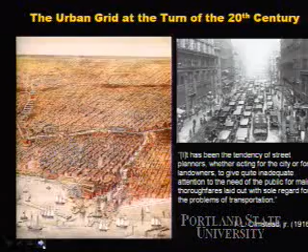So you had early planners and urban designers, none less than Frederick Law Olmsted, complaining about this development form. As he said, it's been the tendency of street planners, whether acting for the city or for landowners, to give inadequate attention to the need of the public for main thoroughfares laid out with sole regard to the problems of transportation. Stated another way, we weren't really thinking about transportation systems at all when we designed this—it was done for economic development purposes, not for addressing traffic.

He proposed an alternative: what his father had done at Central Park. One of the major design problems with building a park of this magnitude is how you get cross-traffic traveling across the park without undermining the purpose of the park itself, which was to provide a pastoral recreational amenity for the residents of New York. There was going to be a lot of cross-park traffic. The question was how to accommodate this in a form that allowed the park to maintain its pastoral form.

The solution was to do transverse roads. Has any of you been to New York or Central Park? Some of you have.

So you may be familiar with these. They run below grade. The solution was, and you can see it running along the top, let's put in a grade-separated road that's relatively direct across the park, preventing people from actually going across the surface. Let's get this through-moving traffic separated from the recreational traffic at the top of the park.

One of the nice things about the early Olmsted plans is he actually wanted to show you what he was trying to avoid. It was all this riffraff, right? The little orphan waifs, the dung carts, the fire trucks, this stuff you don't want to see on the surface. And it's nice that he drew this riffraff running through the transverse roads.

That's what he was trying to design for. Now today it handles a completely different type of riffraff. So today these are the major traffic conduits through the park. If you've tried to travel across New York, not that you should have any good reason to drive there, but if you did, you'd likely have used one of these roads. So that's what the intention was from Frederick Law Olmsted Jr.

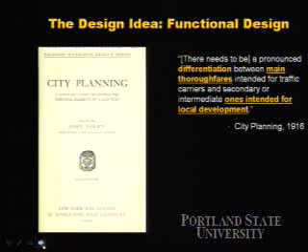And this was carried forward into some of the early design guidebooks for city planning. In this case, this was edited by John Nolen, 1916 City Planning. What was argued is that rather than doing street grids, we need to bring in a differentiation between main thoroughfares, these major traffic conduits, and secondary ones intended for local or recreational use. Let's take the design lesson of Central Park, where there are different thoroughfare types for different transportation purposes, and apply that to the design of our communities, with the two principal types of roadways being major traffic roadways and local roadways. And this is where we get the functional classification system.

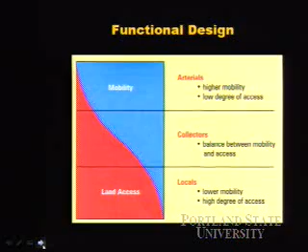And we blame engineers for this, but this was an urban design solution, right? The same mindset flows into, and this is the classic functional classification graphic, we go from arterials, which are designed principally for mobility with little access-related traffic, to locals that are intended exclusively for access with little or no mobility. That's where this idea comes from.

Now it was carried forward into design practice by folks like Clarence Perry. Many of you may be familiar with his neighborhood unit concept. I know a lot of the new urbanist groups present this, and in many cases present it as a model of what ought to be done. It's not a terrible design, but it's important to recognize what this is. This is not a traditional community. This is a community intended to expressly solve specific traffic problems.

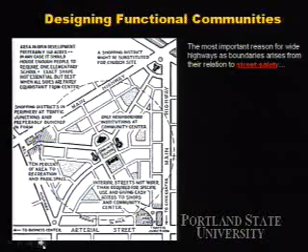What's going on here is we've got a neighborhood bounded by major arterial streets. They do that, and it's designed this way to address the issue of street safety. The intention is to create high-speed through arteries around the community to prevent traffic from penetrating the interior. Now, this is the same idea Olmsted was suggesting, translated into a further form.

But what Clarence Perry did over and above this was he changed the land use configurations too. So rather than just changing the way we design streets, let's also reorient land uses to reinforce the separation of traffic functions. Community-oriented uses, community centers, parks, schools and churches, things that don't generate a lot of external traffic, the recommendation is to internalize them. But the neighborhood shopping, the retail, the commercial, get those outside of the community itself. These are pushed out onto the arterials and specifically onto the intersections of arterials.

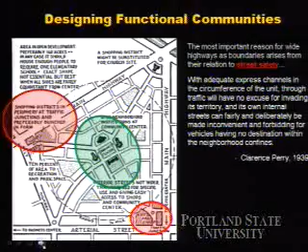Now, if there was any confusion about what he was proposing here, he showed us. Housing for the machine age. The optimal retail solution for these communities is one located at the intersection of two arterials, designed to accommodate the parking generated by the pass-by traffic on those. His assertion: it's one of the advantages of the neighborhood unit scheme that it makes good business locations definite and easily found. Put them on the major traffic junctions.

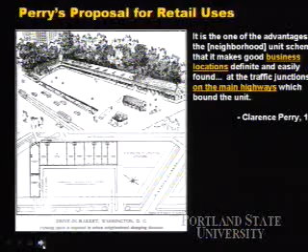That's where that traffic wants to be. That's where it wants to access. Neighborhood folks traveling to and from work can access these things, and you can capture pass-by trips off the arterials. It's win-win, right? It's a good solution.

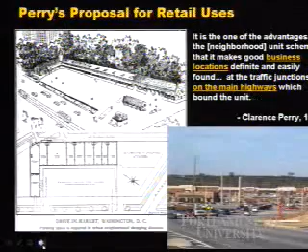And it's what we have today. The model here from the 1930s is the model we still employ, albeit in a modified form, in the 21st century. And it reached its archetypal form in Radburn. Radburn took this idea and extended it even further.

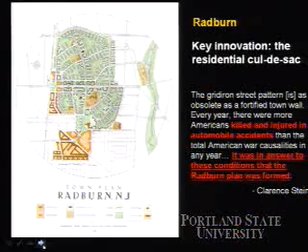The key innovation here was the residential cul-de-sac. And what we see in Radburn, again, is major arterials bounding a community. The retail use is pushed out of the neighborhood and onto these arterials. And then, to make sure that nobody cuts through the residential streets, we'll put them on cul-de-sacs so that they don't connect anywhere. And the idea behind this, often overlooked, was expressly a traffic safety solution, because the gridiron pattern is as obsolete as a fortified town wall.

Every year, there are more injuries and deaths associated with automobile accidents than the total American war casualties in any year, and it was the answer to these conditions that the Radburn Plan was formed. Let's take this traffic, push it out of the community, put it onto these arterials, and we will address urban traffic safety problems. Now, the question then becomes, what was the empirical base on which these assertions were made?

Well, there was one study, up until recently, that really looked at this - a 1957 study by Harold Marks. What he did is he looked at gridiron residential neighborhoods and he called them limited access subdivisions, disconnected subdivisions, to see which were safer. And the limited access ones, the disconnected ones, had fewer crashes and injuries - well, he just looked at crashes - than the gridiron ones.

But there are a couple problems with this study. Oh, and intersection type matters too - you have fewer crashes on 3-leg intersections than you did on 4-leg intersections, regardless of community type. 3-leg intersections were safer. But one of the major problems is the study didn't account for vehicle miles traveled.

One of the major complaints with the grid was that it allowed traffic to diffuse through a neighborhood's boundaries. And as a result, inside these neighborhoods, you're going to have higher levels of VMT. So you're going to have higher levels of exposure. And it wasn't accounted for in the study.

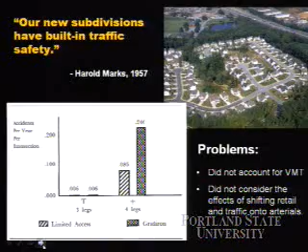The other thing, and what I would assert is more problematic, is it didn't account for the effect of displacing traffic away from the residential areas itself. If you have a disconnected subdivision, the only traffic in that area is going to be the local traffic itself. So you may have fewer crashes within its boundaries, but it may be accomplished only by displacing those crashes elsewhere, or even increasing the amount of crashes that would otherwise have occurred.

By the same thinking, if you want the absolute safest street for motor vehicles, what you do is you close off all motor vehicle traffic, right? Problem solved. You don't see a lot of pedestrian crashes.

So the guiding safety ideas driving this form are: one, we need to design roadways for a specific traffic function - and the current project to supplement the functional classification system is an objection to that safety principle. The second is that the street network ought to be redesigned to eliminate cut-through traffic. And then finally, we ought to relocate traffic-generating uses onto arterial roadways.

Now, there's one more element of this that needs to be considered. Why do we design these roadways to be so fast? Arterials are intended to carry high volumes of traffic, but we also carry them at high speeds. Well, this started because we separated out the design of these roadways from the planning and urban design groups to traffic engineers. And it started in 1916.

A major concern we had in the United States was how do we develop a highway system that can help carry freight goods across country? On dirt roadways, this is very problematic. Here, your roadways are always muddy, so it's always a nightmare. In Texas, it rains during one part of the year. They get all boggy, and then it gets real hard, and it becomes very rough to travel.

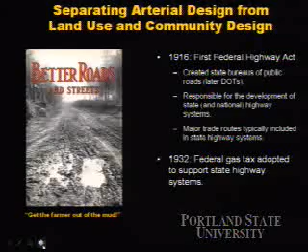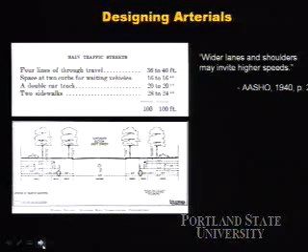But that is not entirely where we got the speed issue. If you go to the earliest edition of the Green Book, which came out in 1940, there was express concern about the use of wider design features. We widen roadways to get people to go faster, and you may invite higher speeds. There was a concern about that, specifically in urban areas.

This idea was that we have an epidemic on the highways. Epidemiology is concerned with eliminating environmental sources of hazards, with the founder of that being John Snow. The concern in England was an epidemic of cholera, and the question was how to keep people from drinking out of contaminated wells. Rather than educating them not to drink from a contaminated well, John Snow just pulled the handle off the pump of the well, which is now in a tavern right behind where it stood. By doing that, it was a very simple and effective solution. It kept people from drinking that water.

What Nader was arguing was that we ought to apply the same kind of principle to traffic safety. Rather than trying to tell people how to behave safely, let's just assume they're idiots, and let's design under the expectation that they behave like fools. We'll assume they engage in bad behavior, and we'll design to eliminate the consequences of that.

This resulted in a public outcry to address the design dangers of our roadways, which then triggered the 1966 joint U.S. Senate AASHO Highway Safety hearings. At the time, we didn't have systematic recording of traffic data, but folks did the best they could. They found that interstate highways, though designed for speed, reported fewer crashes than other highway types. This was a really novel finding — it wasn't something we would have expected to find.

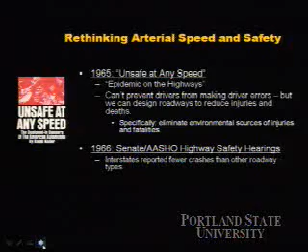The wider lanes were meant to allow people to travel faster. The shoulders were to allow people to break down and get out of the throughways. This wasn't intended for safety — that it was safer was a eureka moment. Why is this? It must be addressing these designed dangers in an effective way.

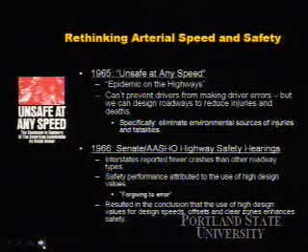It makes sense from an engineering perspective — we've got extra room, extra latitude. If there's a wider lane and a driver makes a mistake, there's more room to correct. If a driver runs off the roadway, that clear offset and paved shoulder gives more room to correct. That must be why it's safer. So we concluded these were safer for those reasons — that they were forgiving to error. This is why we have the idea that high design values, high design speeds, result in safer roadways.

The testimony at the time included things like: what we've got to do is convert the 90% or more of our surface streets to freeway conditions. Let's take our local streets, collector streets, and arterial streets and apply freeway conditions to those — if it's good for freeways, it's got to be good for urban surface streets. One size fits all. Kenneth A. Stonex, by the way, is one of the leaders in traffic safety in the profession. If you get a Lifetime Achievement Award from the Transportation Research Board for traffic safety, it's an award named after Kenneth Stonex — that's the man.

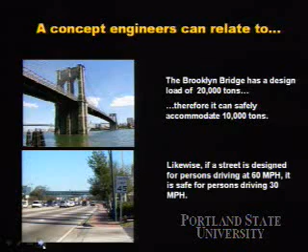But it's a concept that engineers, and I say this as one trained in engineering, can relate to, because we learn about things like design failure. If the Brooklyn Bridge has a design load of 20,000 tons and can accommodate 10,000 tons, we've doubled that margin of safety. Applying the same mindset, if we want to double the margin of safety for people traveling at 30 miles an hour, you design for 60 — because if it's safe for 60, it's got to be safe for 30. That's the idea, and we see that in the design guidelines that have come forth since.

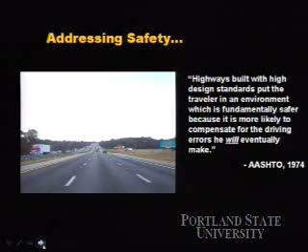Highways built with high design standards put the traveler in an environment that's fundamentally safer because it's going to compensate for the errors he, or not to be sexist, she will eventually make. In the more current edition of the Green Book, every effort should be made to use as high a design speed as practical to attain a desired degree of safety.

So what we now have are the 3 urban design principles plus the fourth one added by engineering, which is these through-moving high-speed facilities ought to be designed for really, really high speeds. Make them super fast.

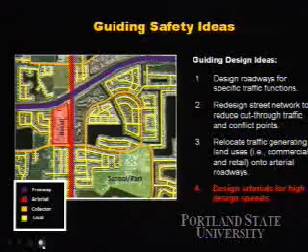So the question I had, and this comes from an article that came out in the Journal of the American Planning Association over the summer, was: does this urban form result in safer communities? I didn't think we'd done a particularly good job of examining it before.

So what I did, with a co-author, Robert Rae, is we looked at crashes in the San Antonio region. San Antonio was selected because, even though Texas gets a bad rap for having terrible cities, we actually do have some nice places, and a lot of them are in San Antonio.

Downtown San Antonio, the King William District up at the top, are some examples of pretty good urbanism. But of course, it's Texas, so we have our sprawl, we have our rural stuff. We've got a high range of design variation here.

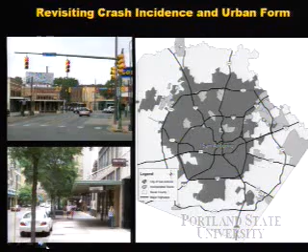That's not solely why I selected San Antonio, though. It was also handy because 90% of the 1.4 million people in the region live in the city, which means you can get data in a reliable form from one source, the San Antonio Police Department. This prevented me from having to deal with other jurisdictions that may have different data collection procedures, so it enabled me to get reliable data from a single source.

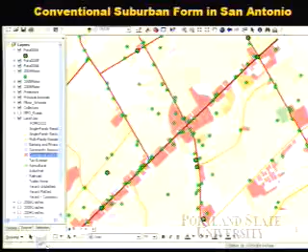What we did is take the data for San Antonio and integrate it with parcel-level land use data and street data, so that we could look at the land use characteristics, the street and street network characteristics, as well as the distribution of crashes environmentally through the region.

To operationalize it, the question becomes: what do we use as a neighborhood? One thing we wanted to look at was the effect of demographics on crash incidents. So we took census block groups—not the ideal definition of a community, but about the best we could do from a data standpoint. We captured the census information in each block group, then aggregated the crashes and land use conditions up to the block group level.

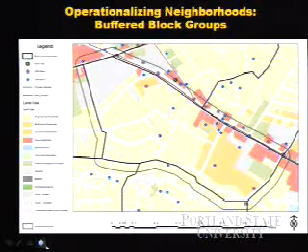The variables we used—I'll tick these off quickly because I know this is the kind of stuff that's pretty tedious, right? We academics love to go on about this stuff, and it really bores an audience. I'll hit this quickly and then get to the fun stuff. But it's important to tell you what we did.

We controlled for block group acreage, vehicle miles traveled, median household income, and the presence of particular at-risk populations—were there elderly folks over 75, were there young adults.

But the urban form variables we wanted to look at: what were the effects of density on crash incidents? We saw that 3- and 4-leg intersections had different safety effects, so we brought that information in as well and figured out what the presence of those intersections within a community would be.

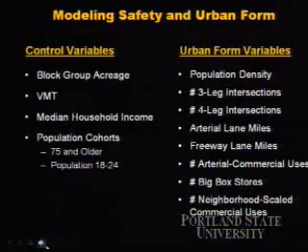We looked at the total mileage of arterials, total mileage of freeways, and then the land uses: how many arterial-oriented commercial uses were there, how many big box stores were there in a community, and how many neighborhood-scaled uses were there.

We examined 3 dependent variables: total crashes, injurious crashes, and fatal crashes. The reason is that the factors influencing different crash types may be different. You may have a strategy that's effective for reducing total crashes, but if all of those remaining crashes are fatal, it's hard to argue that it's a safer environment. So we wanted to look at whether different environments or conditions affected the different crash types.

Skip these real quick because you don't care. Right? Hey, we're geeks here. Assume we don't care.

Okay, the ones you guys are going to want to know, I'll hit these. VMT is what you think—it's the sum of the vehicle miles traveled within a community. Density is the number—we use population rather than housing units because people drive, housing units don't drive. So it's populations per net residential acre.

The urban form stuff, you'll want to know because it's important. We operationalized strip commercial as simply whether an arterial was located adjacent to, or commercial use was located adjacent to, an arterial. Big box was whether one of the retail or commercial uses had more than 50,000 square feet, but a floor area ratio of 0.4 or less.

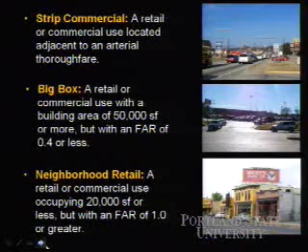Stated another way, there's a lot of lot in a little building, because it's got a big parking lot. Neighborhood retail was a retail or commercial use that occupied 20,000 square feet or less, but had an FAR of 1 or greater. Or to state it another way, the building envelope was as large as the parcel itself, which could mean it encompassed the entire parcel, or if it's 2 stories, half of it. It's a higher level of urbanism. So it's also not just a proxy for neighborhood retail, but it's also a proxy for whether or not it's an urban environment.

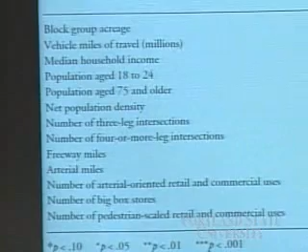The models used—this is the stuff that really bores you, and I'm going to show this in a better form in a minute. But this is up here for the interest of disclosure. The model results, we use negative binomial regression models. It's the right model for using over-dispersed count data. I'm waiting to see you yawn. That's what we used. The results are easier to show another way. We could tick off each of those coefficients and you'd be bored.

Here's what we found. For the control variables, we found what you would expect. Median income had no effect on total crash incidents, but it was associated with fewer injury and fatal crashes, and you would expect that—wealthier people have newer cars, invariably more crash-worthy. So areas with more wealthy people had fewer injurious and fatal crashes, but their likelihood of being involved in a crash was the same.

Older adults—the presence of older adults was associated with more total crashes, but had no effect on injurious or fatal crashes. So more fender benders there. One thing we know of older adults is they compensate for declining abilities by reducing their speed, which will reduce severity. That's a theory, and at this aggregate level, I don't know that that's necessarily correct, but it's the best interpretation. In either event, it's controlling for that element.

Younger adults have the same factor you would expect, associated with increases in all crash types—significant for total and injurious, positive but not significant for fatals. Part of the reason for that is simply that the count of fatals was probably too low to register as significant, but the association was positive. VMT was associated with an increase in crashes as well, as you would expect.

Now the good stuff, the urban form stuff. To understand the results, it's important to understand that the design conditions that we exist in today are not the design conditions at the turn of the century. Your Model T could go about 35 miles an hour—that was about the maximum speed. And with pavement conditions in the 1920s and 1930s, it wasn't getting anywhere near that much.

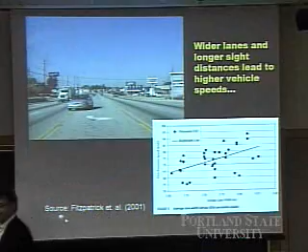So when we do what we currently do, we widen out these roadways for high speeds, what we wind up seeing is, unsurprisingly, higher speeds. People get on these roadways, it allows them to travel at higher speeds, and they do travel at higher speeds. And this creates the safety problem.

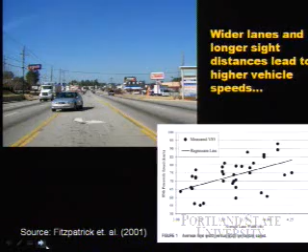And I can show this in Portland. Now, the idea here was to enhance sight distance, with the objective being that people who can see a longer distance are better prepared to respond and react to a hazard that enters the travelway. That was the idea. But what happens is people adjust their speed upwards, and this creates the problem of stopping sight distance. The faster you're going, the longer it's going to take you to bring your vehicle to a stop.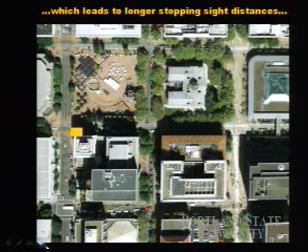Broadway. Let's say you're at Broadway and you see a hazard crash or a hazard at the end of the travelway. How far will you travel before you can bring it to a stop? Well, at 20 miles an hour, you can stop within 100 feet, or by mid-block. That's pretty good. Increase that speed to 40, and you're getting through that next intersection before you can bring the vehicle to a stop.

And bring it up to 60, which is what we often design our arterials for. You're going through that first intersection, you're getting ready to enter the second. So what happens is anything that crosses needs to cross beyond that location for you to be able to avoid that crash.

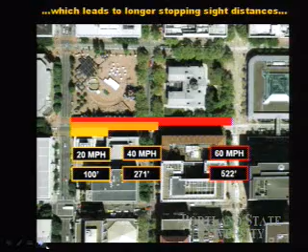Now, we know nobody drives 60 miles an hour. Well, hopefully not on Broadway. You would expect not. But the point is to illustrate the scale or the distance that gets traveled. Now, it doesn't happen on Broadway, but it happens on our arterials all the time, right? That functionally serve the same developmental purpose. Just as downtown serves a lot of commercial and retail, we line our arterials with all of this, and we get the same type of urban traffic.

People trying to cross the street, except now people are going faster in the through lanes, so it takes longer time to brake. So you've got kids running out on their skateboards, you've got a potential problem. But it's not just pedestrians. Motorists turn in and out of those driveways, and the same safety problem applies. Somebody cuts out of that driveway, they're apt to get rear-ended. People try to turn left, they get T-boned. These types of crashes begin occurring in this environment, and the people going through the through lanes aren't prepared to respond to those conditions.

And the issue that I want to raise is the issue of systematic design error. Now, in engineering, we try to address random error, or the result that happens for people behaving like fools. And people do drive like fools, and we ought to address that. But we're also creating conditions that lead to error. And not only don't we address that, we don't even look at it. We don't pay attention to it in design.

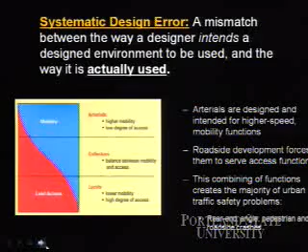Right now, we've got a mismatch between the way a designer intends a roadway to be used and the way it's actually used. On our surface arterials, we design them intentionally for high speeds. But they're used for low-speed access-related functions, and that creates the safety problem. And the types of crashes you see - rear-end, angle, pedestrian, and roadside - I talked about that yesterday. I won't get into that today. Roadside crashes occur as well.

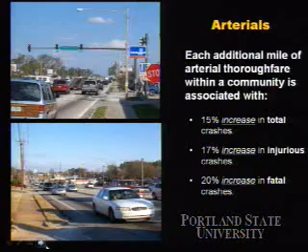Now, when you look at the model results, you see this borne out. Each additional mile of arterial thoroughfare within a community is associated with a 15% increase in total crashes, a 17% increase in injurious crashes, and a 20% increase in fatals. You want to drive up your crash count? Add arterials. That's the solution to your problem, right?

Arterial-oriented commercial uses - these are the ones that generate that traffic. They're the ones that need driveways that vehicles turn in and out of. What do we see? Each additional one adds a 1.3% increase in total crashes and a 1.1% increase in injuries. And they're agglomerative, so to drive up that number, just add more.

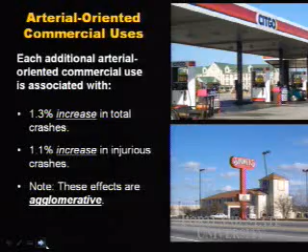Big box stores. Let's magnify the problem more. We've got higher traffic volumes associated with big box stores, and as a result, we see a greater magnitude of effect in terms of affecting crash incidents. A 6.6% increase in total crashes, 4% increase in injurious crashes.

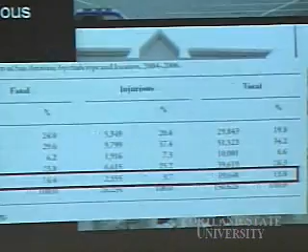But here's one thing that's interesting about this study that I would call your attention to, which is these crashes don't necessarily occur just on the streets, because your big box stores have internal access lanes too. And those are prime locations for people to get into crashes. And they do. In the case of San Antonio, we looked at this, and 16.4% of the fatals were in off-network locations - driveways, parking lots, alleys are counted in that too. About 10% of the injurious and about 13% of the total were on off-network locations, or they were not on a public street. Our conventional form of safety analysis, we don't even look at those.

If you're a state DOT, you look at what happened on the state highway system, and if it happened off the state highway system, it ain't your problem, okay? But I would suggest to you that this may well be a huge safety problem that we don't address right now at all.

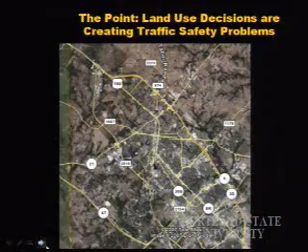And the point I want to make with this is that a lot of our land use decisions are creating safety problems. Because we take a road network like this one, and you can see where the arterials are - they're the bright yellow roadways - and our land use planner comes along, and they superimpose commercial uses on top of that as part of local developmental policy. And as soon as you put this, the arterials themselves are fine if they remain limited access.

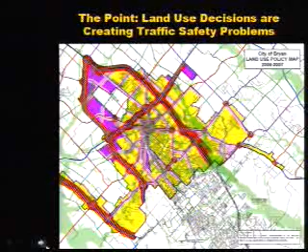But when you put the access on them, that's the combination that puts the bullet in the chamber. That's the problem. Now our conventional response, we can see here, this is actually Georgia. Right, we've got a lot of access, we post a sign, right? We say go 35. Problem is drivers ignore them. People don't pay attention to these signs because they don't tell them anything useful. When police aren't present, up to 75% of drivers in urban areas ignore posted speed limits.

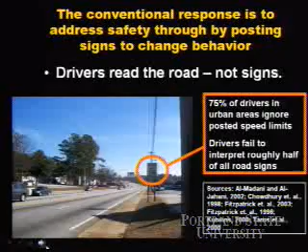They read the road. And interestingly, studies that have tasked drivers with paying attention to the information presented on signs, they don't cognitively register them. They get so used to ignoring signs, or they get so focused on other things that are more important, like is somebody going to pull out in front of me or what are the road conditions, that they overlook the signs entirely, even when they're tasked with doing so.

To reiterate this point, this was a cool study done in Spain, and it wanted to see if you could get drivers to drive a speed limit under the design speed. So they had drivers and tasked them with going 20 miles an hour under the design speed of a roadway, or kilometers, it's Europe. They found that drivers could do that, but they did that by continually looking down at their speedometer. And I would suggest to you that where you want drivers looking is not at the speedometer, you want them looking at the road, right? But that in and of itself is not an interesting finding.

We can do that. What's interesting here is then to see if people would do that under distracted conditions, they had a passenger sit in the car and talk to them. What we see here, the light gray is when the drivers are just driving and tasked with doing that, and you see the speed shift up every time the driver's asked a question or they're engaged in a thought process. So what happens is drivers, rightfully, you have a limited amount of executive level cognitive function. So you orient that towards the task at hand and you automate the other part of the task. So what you do is you wind up shifting off to what the safe speed of the road feels like because your attention's focused elsewhere.

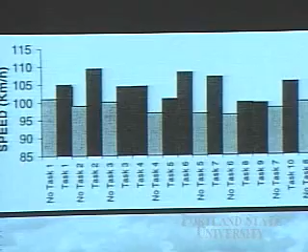And I would suggest to you that under the normal driving condition, even when we're not on the phone, we're not staring at the speedometer. We're listening to the radio, right? We're thinking about what happened during work today. And the result is, and the point is, that you're going to see drivers shift up to what the perceived safe speed of the roadway is, regardless of the speed limit you put there. That's what we're naturally inclined to do.

It's rational behavior. What happens if you change the developmental form of a community? What was interesting, neighborhood-scaled commercial uses were associated with fewer crashes. A 2.2% decrease in total crashes for each neighborhood-scaled retail use in a community, and a 3.3% decrease in injurious crashes. Stated another way, as places became increasingly urban, you saw a significant reduction in the incidence of total and fatal crash, or total and injurious crashes.

And this is in other work, I've seen this before. I looked at whether or not these livable streets were safer than our conventionally designed arterial roadways. And they were. Per vehicle mile traveled, livable streets, and this was done in Central Florida, had 40% fewer mid-block crashes than roadways on a whole, and 100% fewer fatalities. Those traffic fatalities weren't occurring on your main streets or your pedestrian-oriented streets. Your problem is the arterials.

Actually, and these roadways were all designated as state arterials. The difference was, zero fatalities on the livable side. I had about 2 miles worth of them in there, and I had about 25 miles of total roadway. None of the fatalities happened there.

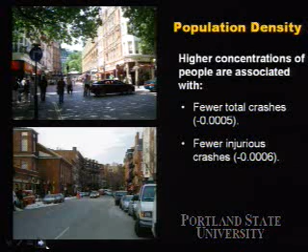Now, other urban form variables that may matter. Population density: each additional person per net residential acre resulted in a teeny tiny reduction in crashes. But it was significant, right? And you wouldn't expect each additional person to have a huge effect, but it had a little effect. So higher densities in general were associated with fewer crashes. But I would suggest to you that density is probably going to be more important for its moderating effects rather than just in and of itself, right? Because at higher densities, you generate less VMT. You also have higher demand for creating urbanized land uses, which are also safer.

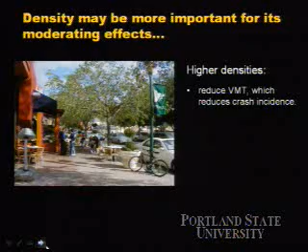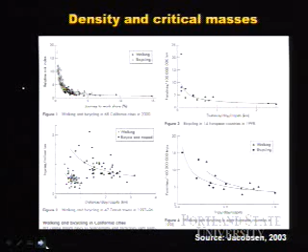And you see this in other studies. And actually, I was talking to a fellow from the city here, and you're seeing this in the city here as well. Once you reach a critical mass of road users, people adjust their behavior, and you see places become more safe, or in this case, you see fewer crashes. This was a study by Peter Jacobsen a few years back, and it confirms what you're seeing here in Portland, right, with the agglomeration of bicyclists. As you reach a critical mass of people walking or biking, you see crashes involving these users decline precipitously.

Safety in numbers is the name of the article, and it's the same idea. Density will get you that critical mass that will allow you to get that safety in numbers.

Now, here's one urbanists aren't going to like, right? But in the interest of disclosure, what about intersections? Well, intersections will reduce speeds, and they'll reduce fatals because lower speed reduces the severity of crashes. But 4-leg intersections are problematic. The early designers were right that they're a problem. You're going to have a significant increase in both total and injurious crashes with an increase in the number of 4-leg intersections within a community. And that is unsurprising because intersections are where your major traffic conflicts occur. Divergent streams of traffic have to cross one another, and it creates opportunities for crashes, and it increases crashes.

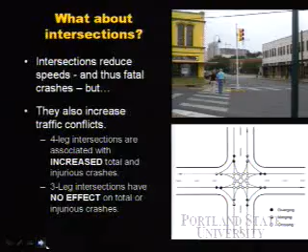3-leg intersections were a little better. And part of the reason is because 3-leg intersections force at least one stream of traffic to stop and yield. So the safety effects for 3-way was actually okay: no effect on total and injurious, and a reduction in fatals. Your 4-leg intersections, however, were the problem.

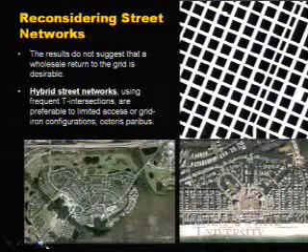So what this suggests is not, as many people advocate, that we should do a wholesale return to the urban grid. There was a reason why early designers were concerned with this, and their concerns were well-founded. It does suggest, however, that hybrid street networks, right, that introduce a lot of 3-leg intersections into a community might be advantageous from the perspective of safety. They're good because they result in termini that prevent vehicles from collecting a good head of steam, and they force one leg of that to yield. And truthfully, a lot of the new projects that are coming in aren't really traditional grids. They're hybrid networks that provide a lot of T intersections and a lot of street termini.

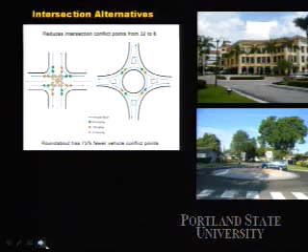But I'm not sure at the level that I looked at this that it would be fair to say that all 4-leg intersections are bad. There are ways to address safety at 4-leg intersections. We've seen this with roundabouts and traffic circles. You put those in, you reduce the number of conflict points, and you'll have a substantial reduction in crashes and injuries that occur. What we're also seeing is psychological traffic calming being put in place.

In Europe, this is Makkinga, in the Netherlands. No traffic control whatsoever. It's actually a T intersection, but you've got 2 of them clustered together. But what we find is that the environment suggests to the driver that a specific type of behavior is warranted, and the result is that you have an elimination of crashes and injuries. People get in this environment, they're not really sure what to do. They can't go very fast, so they yield.

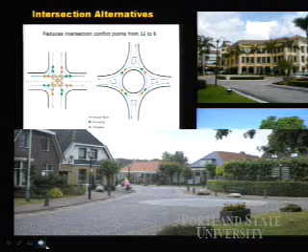And it's cool. And here in Texas, I'll see people get this, and they get this half-baked idea that we ought to take 2 arterials and pull the signals out of it and take all the paint off. That's a horrible idea, right? Well, why it works here - and Hans Monderman, who died recently, his take was: if you want people to drive like they're in a village, you design a village, right?

Because people will respond to the environmental context in which you place them.

Finally, what about urban freeways? I know it's a major project for a lot of folks to tear their freeways out. And you guys in Portland are ahead of the curve, right? You already tore your freeway out. I went jogging on Naito Parkway last night, right?

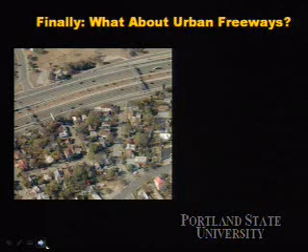Don't tear them out for safety's sake. They're not related to the increased incidence of total and injurious crashes, and they're associated with a slight but insignificant increase in fatals. That's not unsurprising, because the speeds at which crashes occur are going to result in a serious injury or a death. But on the whole, they're not bad roadways, at least from a safety perspective, because they address the fundamental safety problem we have in cities.

Which is the combination of speed and access. And they solve the problem by getting rid of all the access. Pull the access off that roadway, and it's fine. And the principal effect of these is to let people drive faster.

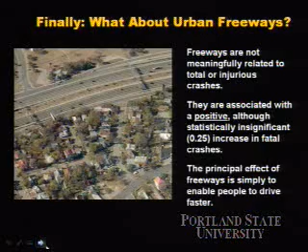Now, what is the useful take-home? Because you guys are professionals, you guys are students, you guys that are going to be professionals, right? And you don't want a lot of academic rigmarole, right? You don't care about coefficients, you care about things that you can use. So let me try to bring three principles here that can be taken from this.

First, it suggests that when we design communities, we need to manage the mobility and access functions of urban arterials. It's not sufficient to say that a roadway is an arterial, therefore it's a roadway for mobility. Because when you put the land use on there for being retail or commercial, you've created an access-related road, no matter what you call it. A rose by any other name, and it's still a rose.

What you need to do is orient those retail and commercial uses towards the lower speed thoroughfares. If there's access, the speed needs to be accommodating to that access. And there are a number of ways to do that that I'm going to show you in a second.

And then finally, we need to start planning our land use, speed management, and access control at the level of the network rather than just the street. It's not enough to say this street is a low-speed street. We need to have a network that reinforces that function and manages speed. If people are going to divert off of one route onto another, what speed are they going to do that? We need to pay attention to that, because there are redistributive effects associated with changing your network characteristics.

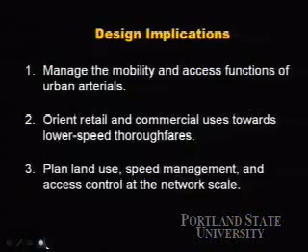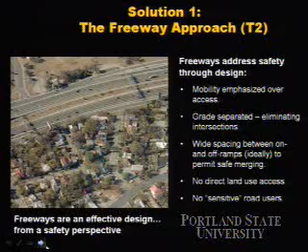Now, one solution that's effective for urban areas - and if a lot of you do this transect stuff, I've transect coded these for you. So one solution might be to do what we do on freeways: address safety through design by emphasizing mobility over access, eliminating access entirely. Now this isn't an urban street. This is a street that belongs on the periphery of a developed area. It provides no direct land use access.

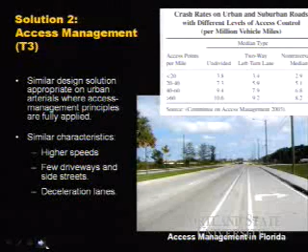An alternative that works is access management. Florida's done a lot of work with this. In fact, Florida has put out some of the guidebooks that direct how we ought to do this. Access management is great because it attempts to do on surface streets the same thing we do on freeways. It eliminates the access function from a mobility-oriented road. It does that by putting in a median that prevents turning maneuvers and ideally eliminates those access-related uses entirely from the roadway, so you don't have a lot of that cross-traffic access that creates crashes. We see this from a TRB report - you can see the reduction in crashes associated with different design treatments.

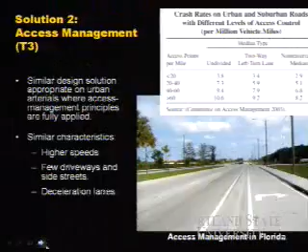However, in T3, this is a suburban solution. I want to make that clear. I hear a lot of folks say we ought to do access management in our cities. True access management is a suburban and not an urban solution, because an access-managed design roadway is not a pedestrian-friendly median-type roadway. Ideally, access management should be done with wide spacing between signalized intersections to allow good progression of traffic. It's still designed for these high speeds. And the median is not your pedestrian-friendly median - it's one that channelizes traffic into locations that you want.

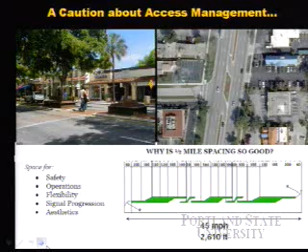And you need to be sensitive to this. Now, you can certainly stage the design of a median over time so that it can transform from one to the other, but strict access management is not an especially urban solution.

Your urban solution are your livable streets. They're lower speed streets designed to accommodate access. Buildings are brought up to the street to reinforce the fact that this is an access street, and the result is a reduction in speed and greater preparedness on the part of the driver to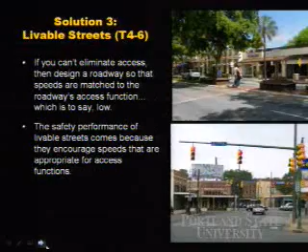address things like crossing pedestrians and drivers pulling in and out of driveways. This intersection here, by the way, is relatively safe. It's a 5-leg intersection, which most of us engineers would gasp at—not just a 4, but it's got one coming out at an angle. But it's relatively safe. Over the time period we looked at, there were 2 or 3 crashes, no injuries and no fatalities there.

Now, what do you do? You're in the suburbs. You're stuck with these arterials. Developers want to build on them, right? That's their natural location. The ideal situation for new development is at the intersection of 2 high-volume arterials. How do you do that in a way that's safe, and how do you do that in a way that you can transition from a suburban to an urban context?

Well, we've gotten pretty good at this, actually, and developers are leading the way on this one. In Florida, we call them lifestyle centers. You guys have those out here? No? Oh, Bridgeport.

Yeah, this is trying to take the best of the access management stuff and the best of the livable streets stuff. Now, they're not doing it because they care about crashes, right? They care about money. And in Florida, we realize if you create a civic realm, you make more money. So you've got developers trying to create a civic realm so they can make more money.

We've got here the intersection of two major highways, but what they've done is they've channelized all that development, not on the highways themselves, but inside on lower speed access lanes with speeds about 10 to 15 miles an hour. You can see the internal development here. That's one of the major access lanes that runs through the development. There's a pedestrian amenity that's been brought in. It's not super urban, but for a strip mall with a Bed Bath & Beyond and a grocery store, it's all right.

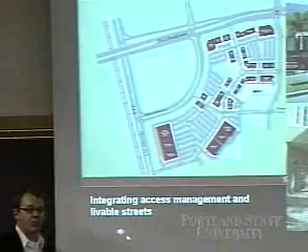But the beautiful thing is, I see these parking lots and I don't get upset. I see them as a land bank. You can infill that. At a future point in time, you've got clear-cut land already. And if you decide to urbanize, take advantage of that—because even if you want the parking, you can put in structured parking later, infill that, and you've got something to save for later.

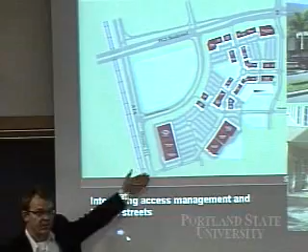So as a transition from suburban to urban, this is the kind of way to think, and it's a way that addresses the safety issue. Now, you're not going to get people safely or conveniently across these arterials, but that's not the point—you've got it in the development. And if need be, you can come back and retrofit the arterials too.

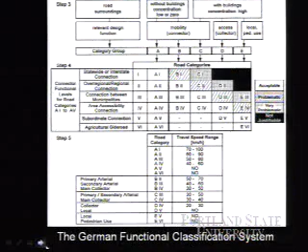Now, none of this I would propose to you is especially radical. It's what Europeans already do. This is complicated because Germans like to do big metaphysical systems, right? But this is Germany's equivalent of a functional classification system. And what we see is that speed limit corresponds to the intersection not just of roadway function, but to developmental characteristic. So arrayed at the top are the different types of developmental characteristics that you might encounter.

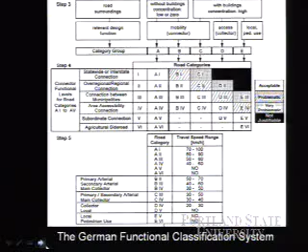You have mobility-oriented roadways without buildings. You have roadways that serve collector functions, and then roadways that provide access or pedestrian uses arrayed on the far right of this chart. And then arrayed in the rows is the type of function of these roadways.

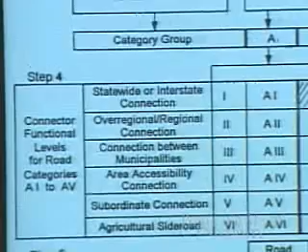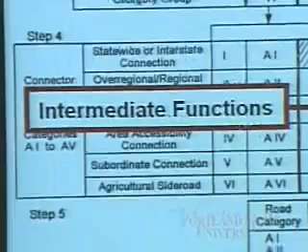Now, what's interesting about this is that unlike what we have—arterials and locals—we don't have good intermediate roads, at least not how we're traditionally trained as engineers. They have them by default. But what's especially interesting is that the max in developed areas, the max speed they would design a roadway for—not the starting point, the cap—is 50 kilometers per hour, which is really 31 miles an hour. Which is where we start our arterials.

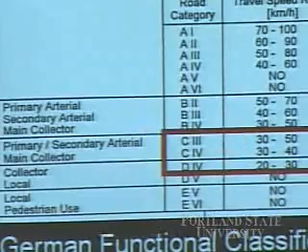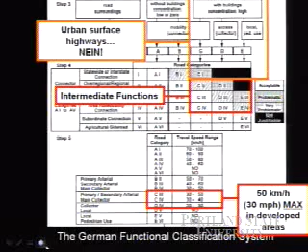And do you put these urban surface highways where there's development? No, that's dangerous, right? Those black boxes are telling you do not put them there. That is not a safe solution—it's a hazardous solution. It's discouraged, and it's discouraged in the interest of safety.

Now, increasingly, there's been a push. The ITE folks, the Congress for the New Urbanism folks have put out—it's got the worst title, they've changed it recently, but the working title has been Context-Sensitive Solutions in Designing Major Urban Thoroughfares for Walkable Communities. Long title, but what it provides is intermediate class roadways, which we have not had in our design palette traditionally.

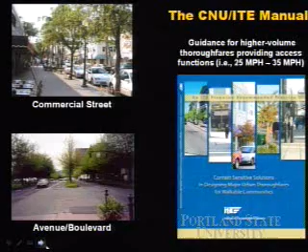Having an avenue or a boulevard type treatment, Naito Parkway being a great example of that, or our commercial main streets. While they may be classified as arterials, and while they may carry arterial level traffic volumes, the correct design specifications for these roadways are not the same as your conventional suburban arterial.

And what this does, it doesn't deviate from the Green Book. The Green Book's not bad, really. You dig through there and you can do almost anything reasonable with the design parameters included in the AASHTO Green Book. What it does is it takes those specifications and tells you when you should use the low end and when you should use the high end, really in this case when you should use the low end. What developmental conditions are appropriate for the use of what ranges in there. So what it does is it fine-tunes the Green Book for designing in specific types of developmental contexts.

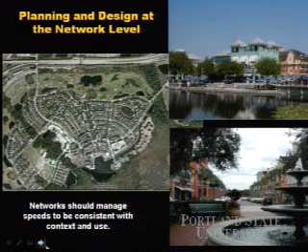And then finally, it's not enough to think in terms of streets. We need to think in terms of networks and about the redistributive function of traffic associated with different configurations. Urban designers are actually already pretty good at that, and you guys that do traffic calming already get this because you already do this. It's just taking it to the next level and bringing the land use phase directly into it as well.

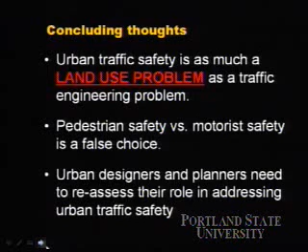So, concluding thoughts before I take questions. I want to make the case today that our urban traffic safety problem is as much a land use problem as a traffic engineering problem. It may be fun to pick on us engineers, but we're not the bad guys, right? Pick on us for entertainment, but don't do it because we're the sole guilty party. There are plenty of people to pick on, and the land use planners deserve at least some of the blame.

I too often hear this debate between pedestrians versus motorists, and I think that's an argument that's not worth fighting. What we should be fighting for are safer communities and roadways. Because the factors that cause a car to run into a pedestrian are oftentimes the same factors that cause that car to run into another car. And if we address the pre-crash conditions that result in that behavior, we can make things safer for everyone. And so what you've created is a win-win situation.

I think the urban design community and the planning community needs to begin reassessing their role in traffic safety. It may be easy to pawn this responsibility off to the traffic engineer, but it's an interdisciplinary problem and it requires an interdisciplinary solution, one that land use planners and urban designers have an important role to contribute to and have made important roles in the past, and one that they need to reassert in the future.